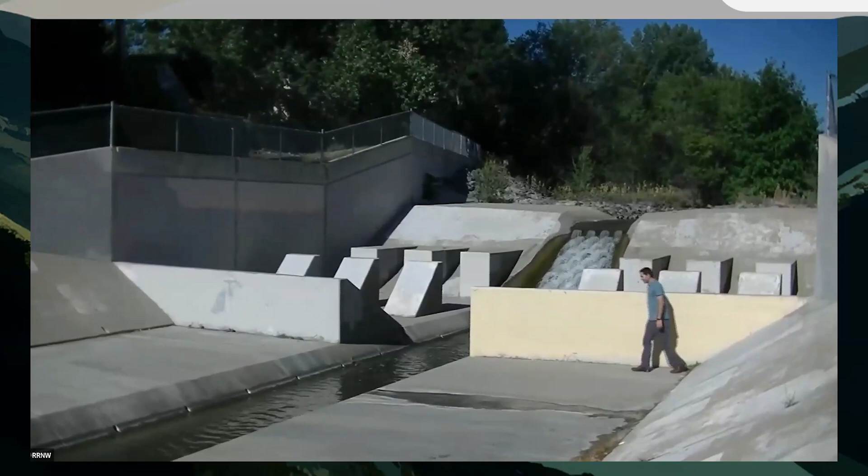All right, you guys do have a sense of humor. I love that. Yeah, I made that video, that sarcastic little video around 10 years ago, and it makes me kind of sad because over time it's a little less obvious that's me because I've gotten all salt and peppery and I got a beard now, and then I also can't jump that high anymore. So it makes me a little bit sad.

But yeah, that is the stereotype about how engineers like me view waterways, because in school we learn nothing about plants or fish or people, really not much about rocks, but it turns out they all can have a major role to play in successful restoration outcomes along streams and rivers.

So my agency is focused on flood risk, and that's hugely important, but floods don't happen very often. So how are we also designing for nature and community? These things can and should coexist, but it takes intention. If we get it right, we're not only making our communities safer from flood risk, but we're also making them more financially sound, healthier, and more livable.

So as we make decisions that impact these vital shared spaces, we have a unique opportunity, and I would say a profound responsibility. Decisions we make have an enormous impact on what's possible or not in these special places where land, water, and people come together.

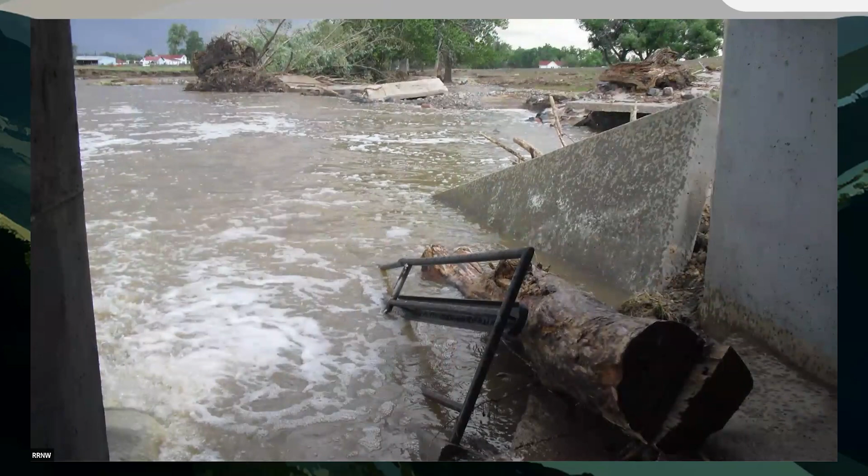But most of my job involves fixing or undoing previous land use and infrastructure decisions. And this isn't about judgment. My predecessors did the best they could with what they knew at the time and the societal approaches to infrastructure. But how do we learn from the past and make better decisions now? Now, some of this learning is technical, yeah, but it's also financial and philosophical.

So I'm going to show you what I mean with a lot of real project examples, some data, some graphs and maps, but also lots of pretty pictures and stories. So as Judy mentioned, I work at the Mile High Flood District. We're a special district that encompasses the greater Metro Denver area, and we facilitate the rhyme and reason to how waterways are managed as they cross 40 city and county boundaries.

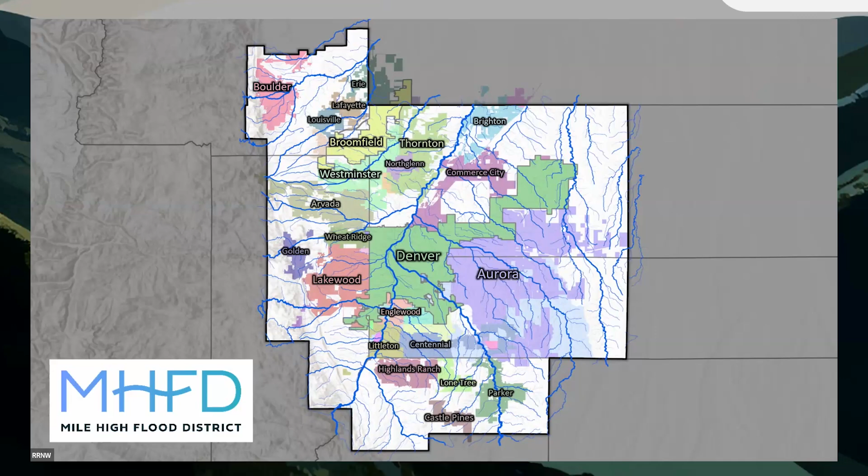We have one river we manage, the South Platte River, so there's 41 miles of that, but we have over 3,000 miles of what we consider regional waterways. So a lot of my examples are going to be on these smaller first, second, and third order streams, but the principles I'll be sharing can be very scalable.

For folks that haven't been to Denver, we're at the foot of the Rocky Mountains, not really in the mountains. We only get around 14 inches of total precipitation per year. The mountains limit westward expansion, but we have lots of room to sprawl to the east if we can find enough drinking water, which is not a certainty. We have some older parts of town too, so it's this interesting mixture of older at-risk neighborhoods that were built before we planned around flood risk, and total greenfield development and everything in between.

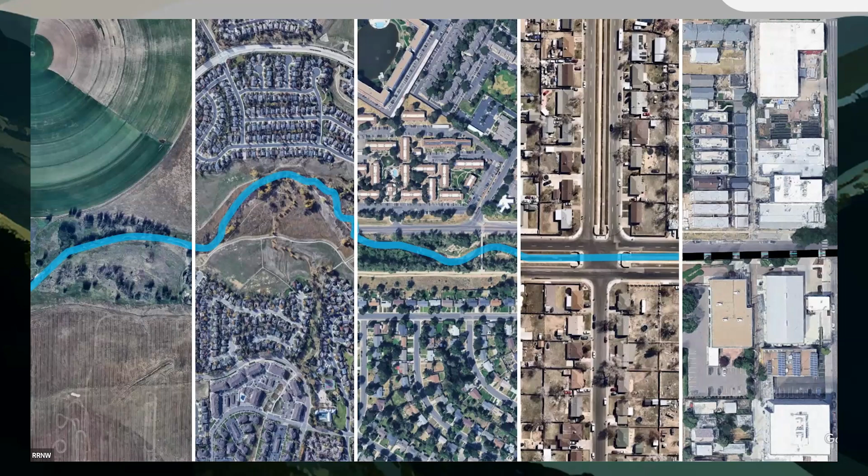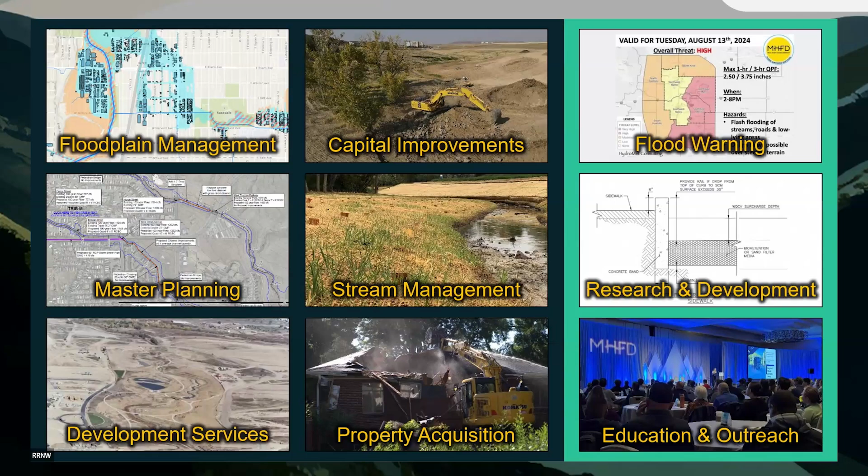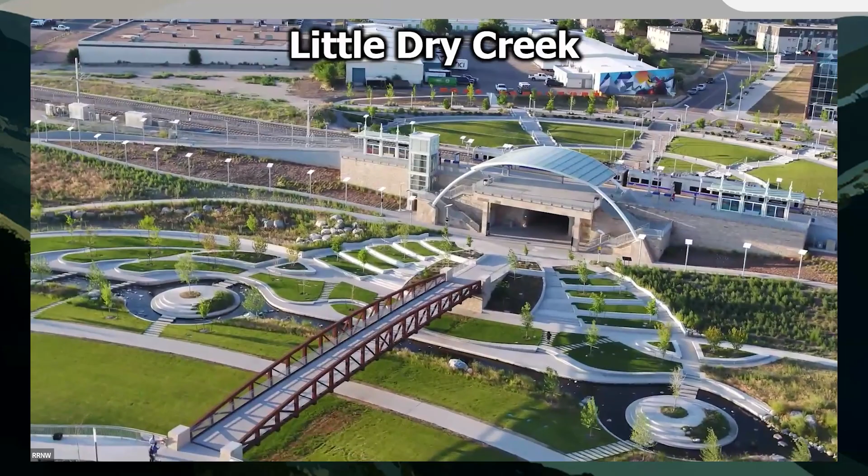So it's clear with the newer project what else is possible along an urban waterway beyond conveyance and stability. So here we're not looking at water as a variable to be controlled, but a force to collaborate with, to create a multitude of ecological and social benefits.

I like to call this blurring the lines. We're blurring the lines to let different functions share some of the same space. Now, I personally worked on this project, and one of my proudest career moments came recently when I was chatting with a young environmental scientist.

He told me that when he was going to college downtown at Metro, he would park at this train station and ride the D line to school every day. And every day he looked out the train at this project, and he told me it inspired him to become an environmental scientist. And I was like, oh man, I wanted to hug the guy, but I didn't want to make it weird. I don't get stories like that very often, but I share that because it's the kind of social impact our projects can have. It can inspire people like that.

Now, flood protection is largely driven by hydrology and hydraulics. These are foundational to our work, but I think of them as kind of the black and white aspects of what we do. Not necessarily easy, but they're quantifiable and mathematical in ways we're very used to. Now, upon this black and white foundation, we also consider these other elements of urban stream function. And I'm going to use the word urban a lot because that's where most of our work resides, but the principles could apply in more rural settings too.

But we use this to help us make more intentional societal choices about what successful waterway infrastructure looks like for a given context. So one of the ways I think about this, if the H&H is the black and white, then the other elements bring color. The browns, the greens, the other colors of the rainbow. It helps us take projects from good to great, makes them community treasures and not just utilities.

So when we talk about multifunction, these are where we start, and we give these equal consideration on our projects. They don't necessarily get equal investment, but we give them equal consideration to find what's the right balance on a project. And we balance them with capital and life cycle costs and the context we're working in. And we don't consider any of these as nice to have or icing on the cake. We feel responsible for finding the right combination, whether it's getting creative with our own funding or finding money from others who can help.

Waterway projects make a lot of decisions around topography and space allocation. And so if engineers like me are making decisions in a vacuum, then we can really limit what else can happen in the same location. Now, it also doesn't serve to focus just on any one or two of these and dogmatically focus on the one and ignore the rest. That usually isn't the right answer, and it just depends. But let's do a little thought experiment to see what this can look like if we get dogmatic about one of these and ignore the others.

And this is going to be with some AI renderings, and this is going to poke a little fun at some really extreme versions of projects. So just go along with me here, okay? All right, so this is an eroded reach of Cherry Creek in Denver, and let's say we want to improve it, and we only focus on flood goals, engineering goals, moving water from point A to point B. You can imagine what this would look like. It'd be the LA River, right?

And let's say we're worried about velocity, so let's include some baffles in there. We don't want people thinking there's a trail down there. I mean, my goodness. All right, I'm glad you guys are laughing. These are meant to be funny.

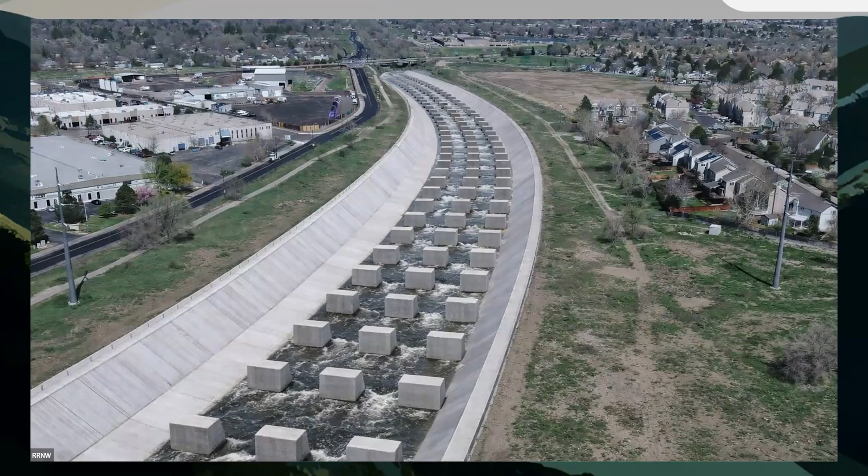All right, let's have some fun if we've thought of this as just a nature preserve. This is not for people. This is a nature preserve. We're going to put in a trail closed sign. You can't tell, but we've planted some poison ivy and some thorn bushes. We're going to reintroduce some fish, maybe some apex predators while we're at it. We're going to throw in a grizzly bear, maybe a pack of wolves. Why not? It's like Yellowstone in the city. It's fine. There's a time and a place.

Okay. All right. Let's switch this around and just focus on people. This is only a place for people.

We're going to make it a paradise for people, and so we're going to manicure this. It's going to have lots of clean lines. All the turf is mowed into perfect strips. Every tree has a seat wall around it. We've got an amphitheater, public art. And let's amp this up another level. Let's go ahead and color the water with some dye, just to complete the Disneyfication.

Well, let's give geomorphology a turn. If we only focused on geomorphology and we thought, what did this creek look like in nature before humans existed anywhere in this watershed? Well, it was a braided stream. Let's go back to that. Any of these projects could be the right answer somewhere, okay? And all I'm trying to imply is that we need to find the right balance between these. That's very contextual, and every project site is going to be a little different.

So this is going to show the actual restoration we built. That's only a year or two post-construction, so I rendered what it will mature into. This is the balance we achieved given this context next to a road, next to homes, and with the hydrology we're dealing with, the sediment load.

And then my presentation cover photo is a real photo from this project site that shows you that balance of ecological and societal functions all in this one very real non-AI photo. I did not AI that bird in there. I really got that, promise.

But this project existed before we figured out how to articulate and simply explain our design approach to others, so this is where the 5 elements have been helpful. A different project would need to strike a different balance. But hydrology is foundational to these outcomes, so let's dig into a quick hydrology anecdote.

So when you see a stream or river in nature, you're seeing an outcome or result. I stole that phrase from Luke Swan a few years ago. And that result is largely driven by climate, geology, and hydrology. And the stream functions pyramid from Will Harman helps us understand how these base layers drive outcomes of the layers above. Our 5 elements were a derivative of this pyramid.

Now we can't control climate or geology. We don't really control hydrology, but we do influence it with how we mitigate urbanization with detention basins and green infrastructure. So let's look at an example of the role urban hydrology plays in stream stability and nature-based design.

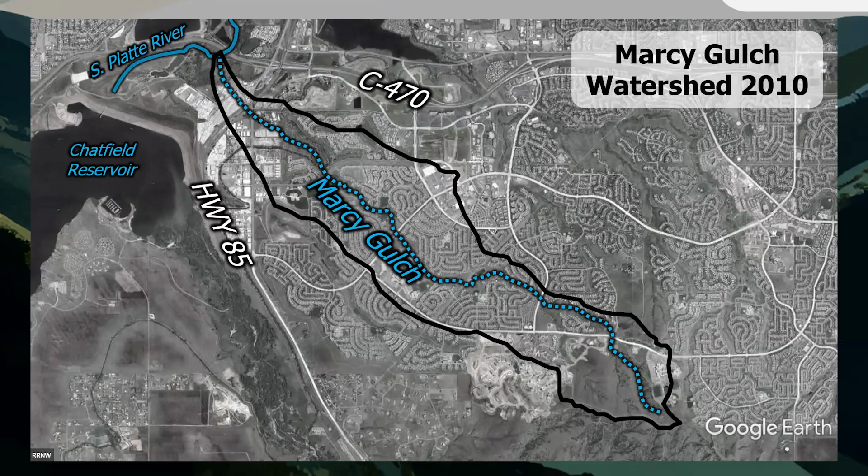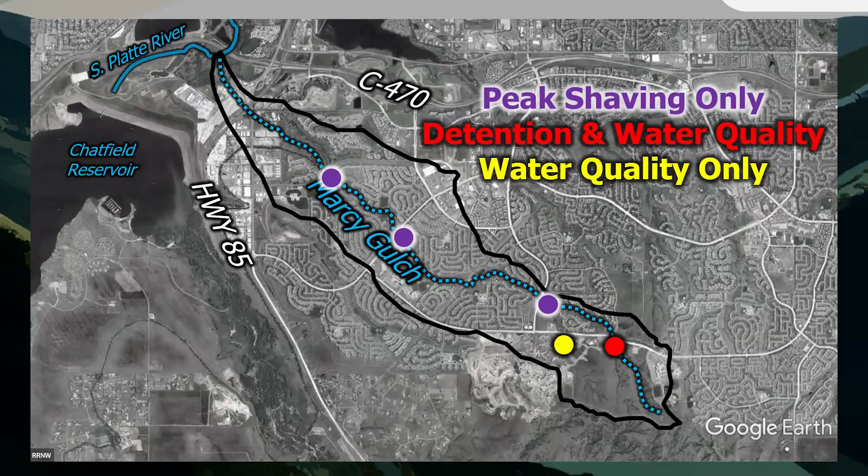A few notes about how this watershed developed from a stormwater management standpoint. You see detention was implemented at the dots on the map. The purple dots only mitigated for 10 and 100-year peak flows. They left a lot of room for the stream. The thinking at the time was no stream stabilization should be necessary because of the online detention. So it was left untouched. That was our approach, preserve a wide corridor and then mitigate for some of the peak flows. So let's see how this played out.

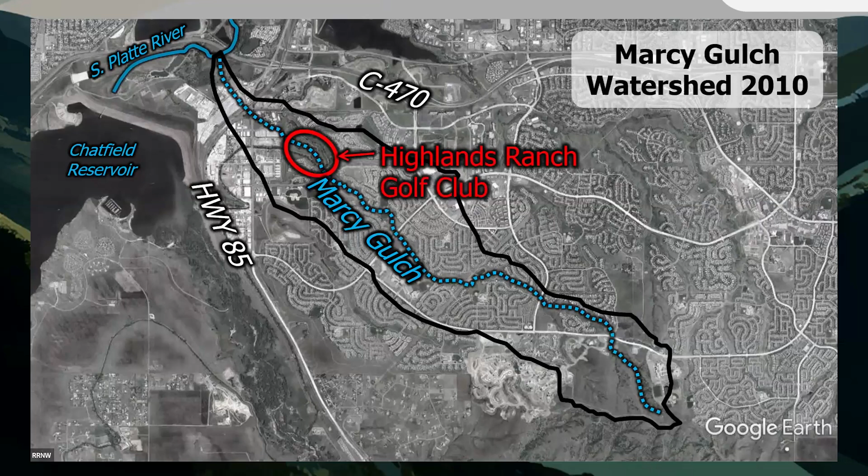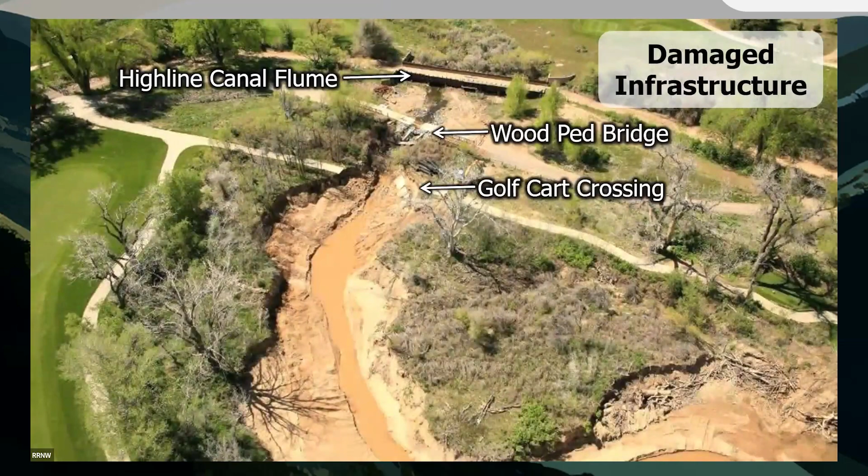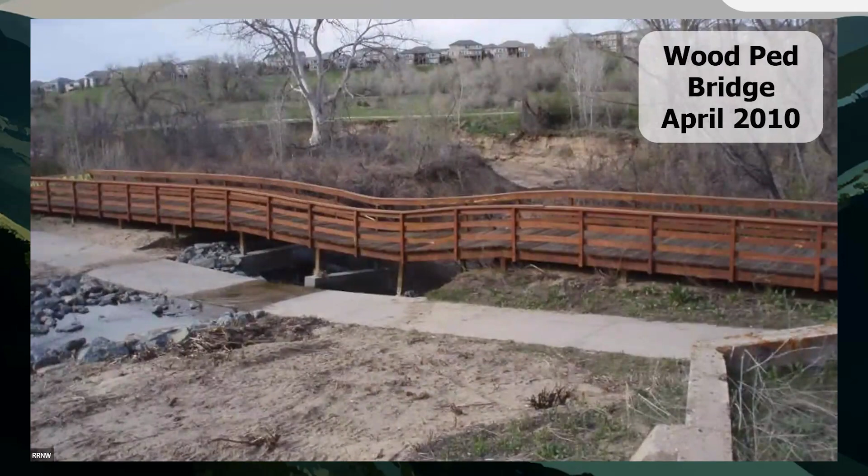The erosion paused momentarily at the golf cart crossing, and then another storm hit and wiped it out. The footings on this ped bridge were already hanging from the bridge, and then the next storm hit, took it out. This flume carries a water supply canal over the creek. There's concrete footings at the bottom, and now how much they're exposed.

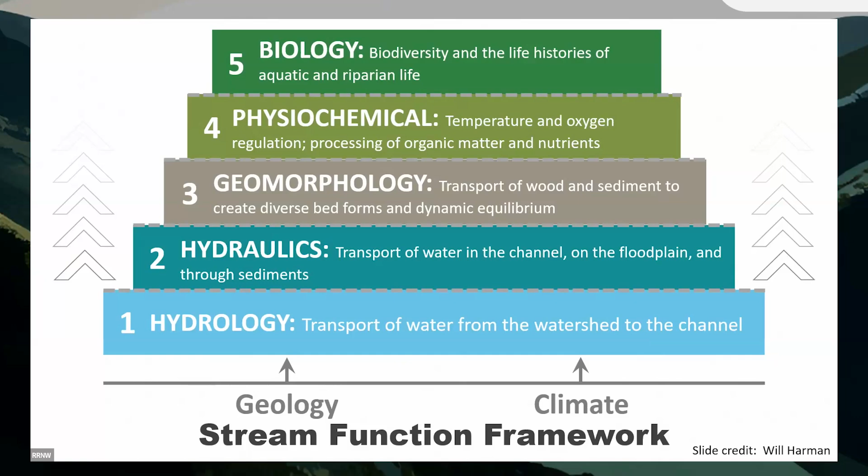These were the consequences in the receiving stream stemming from the land use and stormwater management practices at the time, so the hydrology. The stream fell apart because in its native state, it wasn't equipped to handle urbanized runoff. Now the base of the pyramid changed, so it impacted everything else. The detention basins reduced flood risk, but they did not recreate the natural hydrograph. They didn't make it natural. I would argue they can't really make it natural.

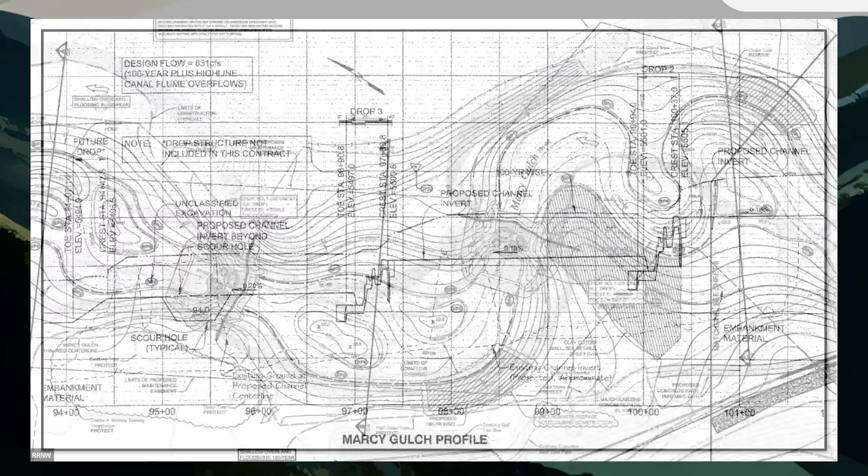So a restoration project was designed. All that sediment had to be replenished. The slope was flattened from 1.8% down to 0.2%. It's really sandy soils, and we used several expensive drop structures like this to control the hydraulics and protect the sandy bed material so that in between drop structures we could rely on vegetation for stability. And so this is what it took to get this reach of stream back into balance. This shows a few before and after images of what the restoration achieved.

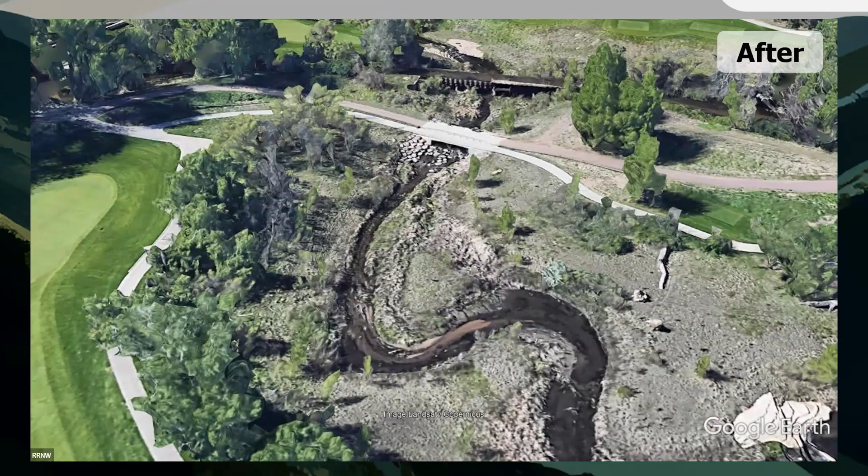And so this example demonstrates why native streams are usually incapable of handling urbanized runoff without severe erosion. But it doesn't mean nature-based solutions are dead on arrival in an urban setting. It just means that we can design them to look and mimic nature, but they need to withstand quite unnatural flow regimes. So we see this as going forward with a healthier, more balanced relationship with nature, given the flow regime we have to work with.

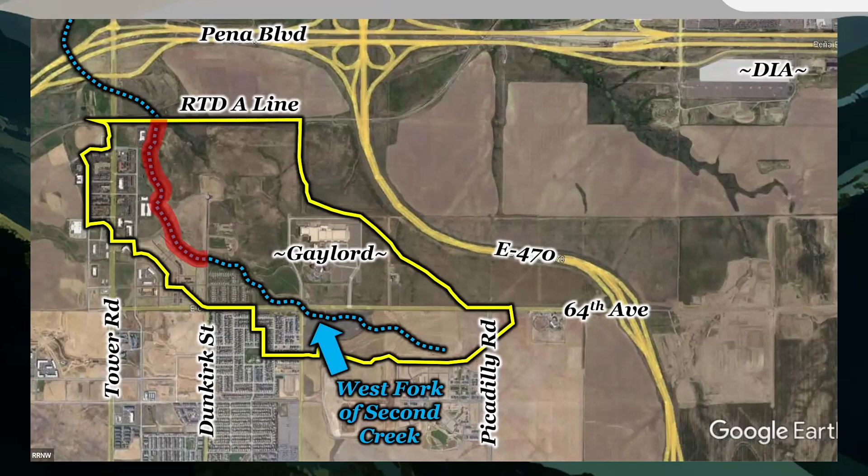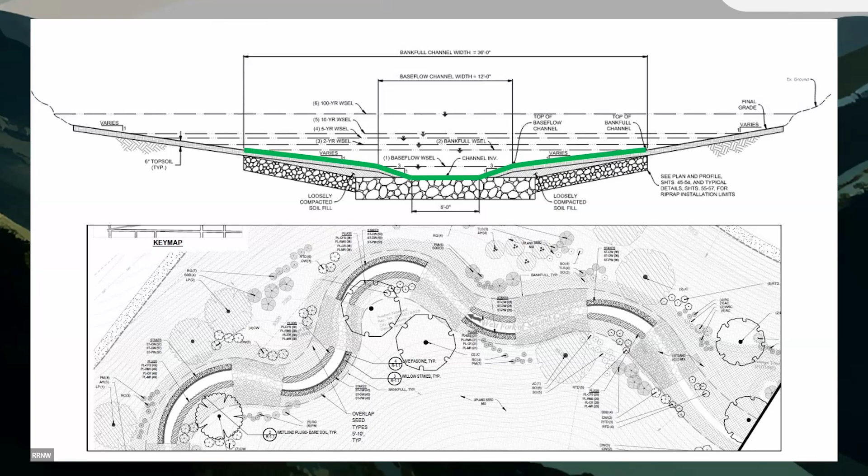They're still prone to erosion, but with both our cross-section and our plant palette, we considered what is going to be the flow regime when we build the project, and what is this going to mature into as the area develops. We were building this before there were many sprinklers or leaky water mains upstream, but we knew they were coming. It was actually studied around Denver that about 70% of our base flow is drinking water, which is interesting in our streams and creeks.

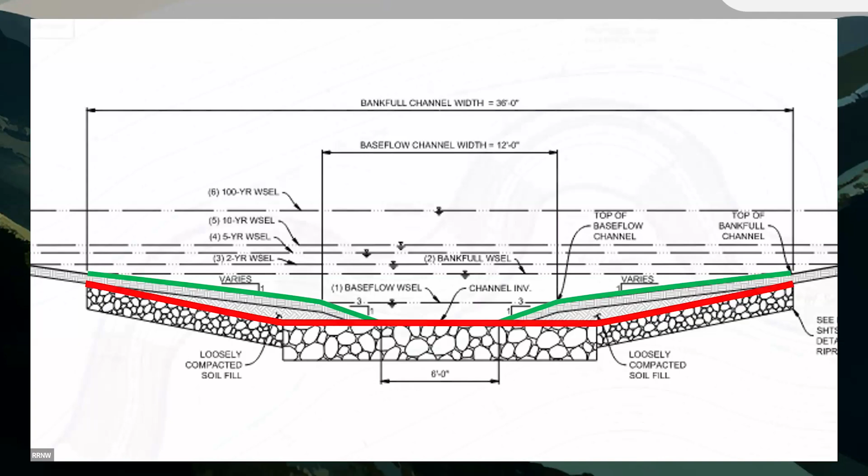So an important point about the riprap: in nature, streams move, of course, and that's a healthy thing. We were mimicking natural form and processes with constructed riffle pool sequences. The unnatural hydrology meant that some rock was needed for stability, but we actually don't want our active channel to move around the valley like it would in nature, because rock like this doesn't exist anywhere in the upstream watershed.

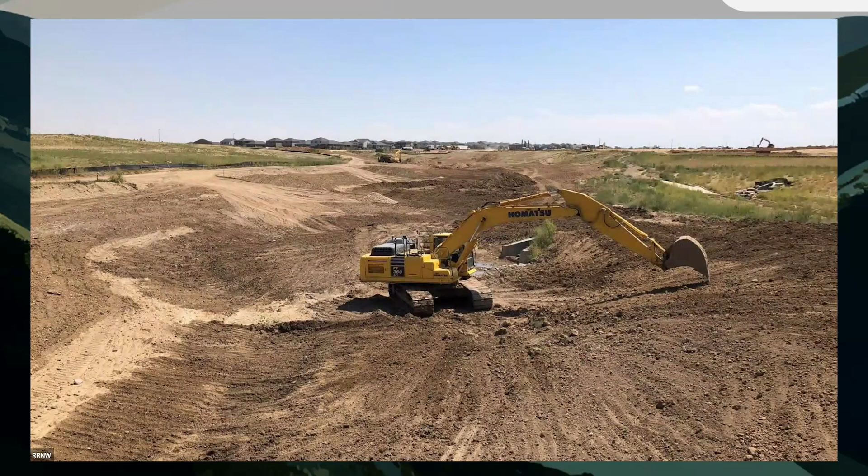You know, natural streams have rock bed material that can migrate in from upstream as things move around. We don't have that luxury here. This shows the native bed material. So any rock we put there, we need to stay put even in a major flood. Here are a few photos of the project before, during rock placement, and then after. So I call this design a bit of a cyborg. It's part natural, part unnatural. This is one of the ways we've learned to collaborate with nature rather than trying to strictly control it.

Now this design relies heavily on vegetation. Colorado's semi-arid, so we didn't have irrigation here. It took us 5 years to establish healthy native vegetation.

Does it take you guys about a month with all the rain you have here? When I was driving here, I saw moss on a Jersey barrier. It blew my mind. I can't even tell you. I was like, they have vegetation on the Jersey barrier.

Very jealous. All right. But we have an internal environmental group that takes over these sites for us and does a great job, because resilience can't just be built, it has to be grown ecologically. For us in the past, 10, 20 years ago, environmental folks were primarily involved to help us just with permitting. But when we rely on vegetation for stability, the ecologists have become mission critical beyond permitting. We formed our first environmental team around 5 years ago.

So they do help us with permitting and compliance, but they also help us with vegetation establishment and daily stream management in ways that engineers like me are just never going to be interested in. So pretty much once the yellow iron leaves the site, once heavy civil construction is done, I'm pretty much emotionally over it. So I'm really glad the environmental folks are just like jumping for joy to get in during this part. It's great.

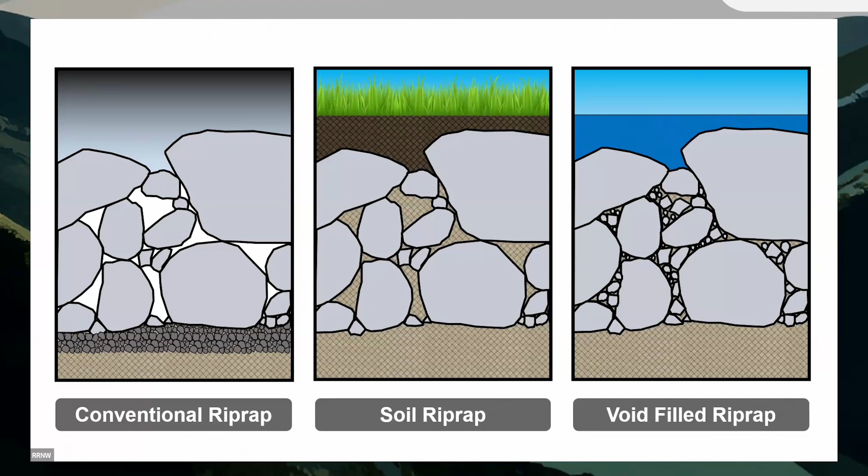Where we need riprap in stream beds to prevent vertical migration, we fill the voids with a mixture of smaller rock to create a dense rock matrix that mimics mountain stream beds. Here's a quick video showing us mixing the void filled riprap. It takes a lot of space to stockpile materials and mix it, stick it in a truck, transport it to the location. Here we're building a constructed riffle, and they have to work the mix a bit once it's in place.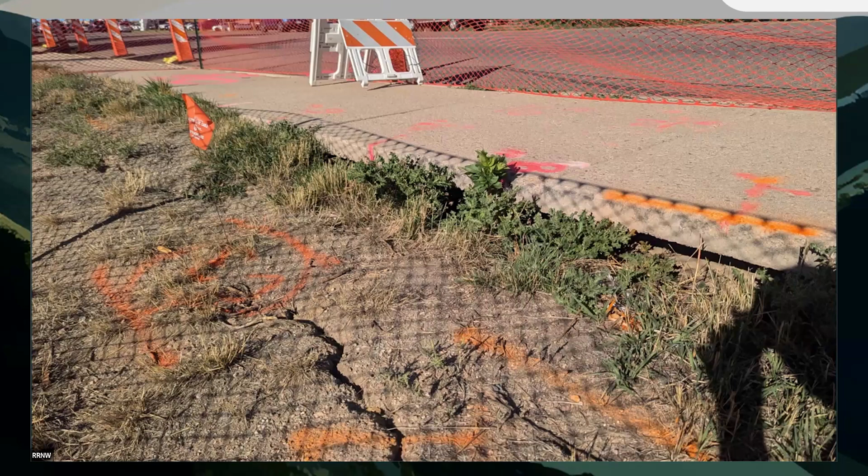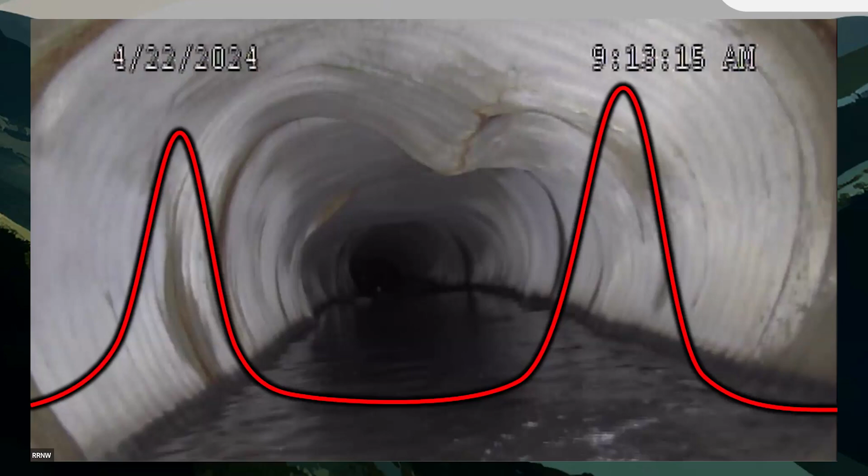But so these projects are expensive to begin with. They get expensive again because the structural solutions get weaker over time. So as an example, there must have been a great corrugated metal pipe salesman around Denver in the 1980s because so many of them are failing. And we had one community had so many sinkholes like this from failing CMPs, they started to name them like hurricanes. This culvert's in a 30-foot embankment under Broadway Boulevard, so it's a big red hump.

With the more naturalized solutions, not only are they less expensive up front, except perhaps in land, they tend to age better because vegetated solutions get stronger over time. Maintenance is more about gardening than it is about replacing concrete and steel. Looks more like the green curve. On the Little Dry Creek project I showed you earlier, the recent project costs us only about $2 per foot per year for routine maintenance. It's the little green blips.

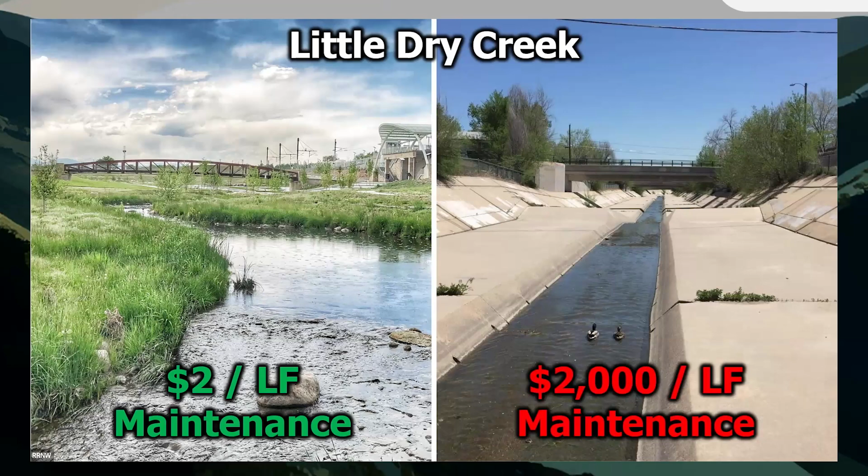The older project costs us nothing per year right now, but when that concrete needs to be replaced, it's going to be about $2,000 per foot. It protects people from floods. It's been an asset, but it's also a financial liability that's going to come due someday. It's sort of like a misfit part in an engine. It may work for a while, but the system is constantly trying to break that.

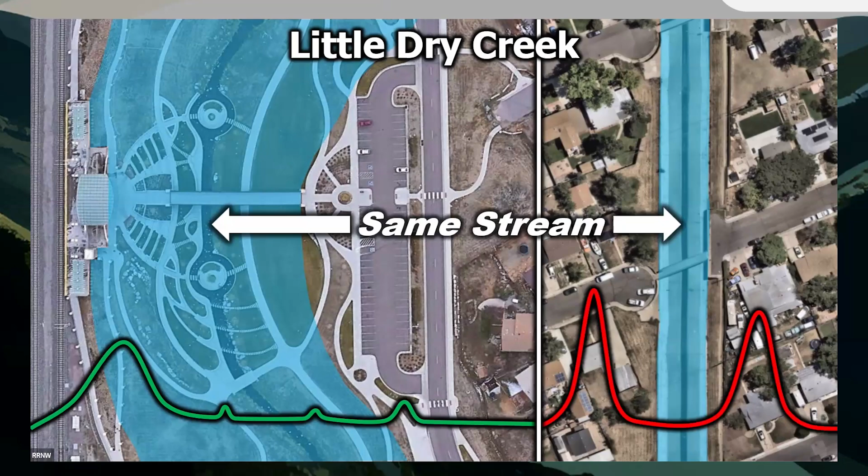So this is why we require larger corridors for new greenfield development, because we shouldn't have to rely on all that hardened structure. Now, nature-based goals are highly impacted by how much land we have to work with, and developers may build the first red hump, but they're usually long gone by the time the second one shows up. That's the taxpayer's problem. And it's a special kind of torture for me to repair concrete channel lining. It's expensive, it's unsatisfying, and then if you ever want to tear it out, like on this project, it becomes a capital project with a capital C, and the second hump becomes even bigger than the first hump.

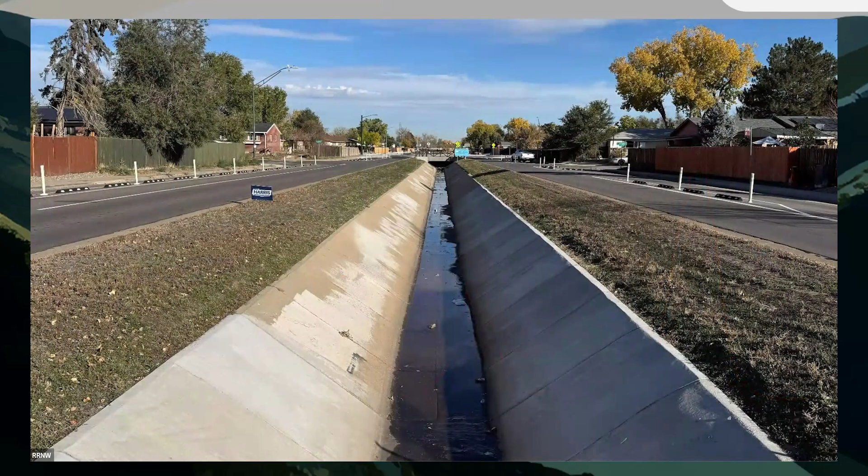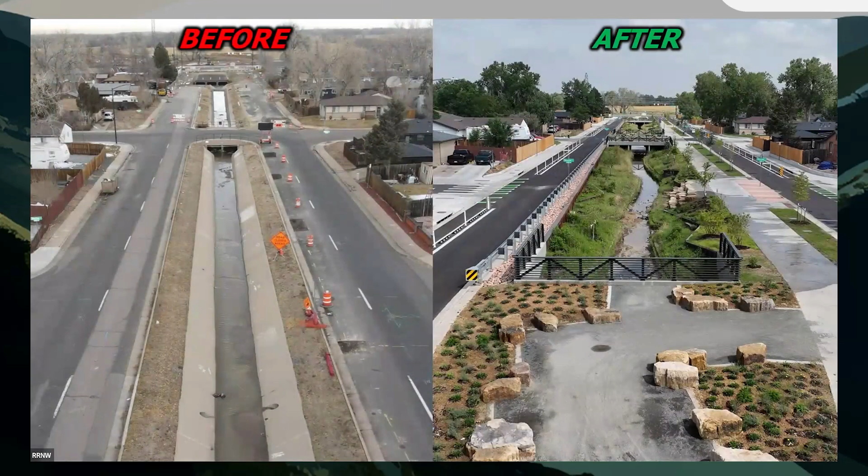Okay, we just wrapped up reconstruction of this entire corridor from fence line to fence line, and over time this is going to become a beautiful tree-lined median. That's a real picture on the right. The entire 100-year flood now fits in the channel. There's lots of buried riprap along here to give it stability, but like I said, resilience isn't just built, it's grown.

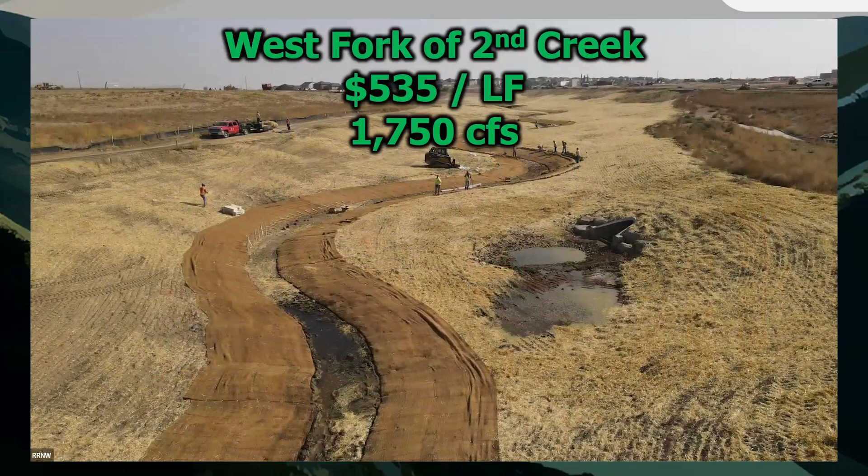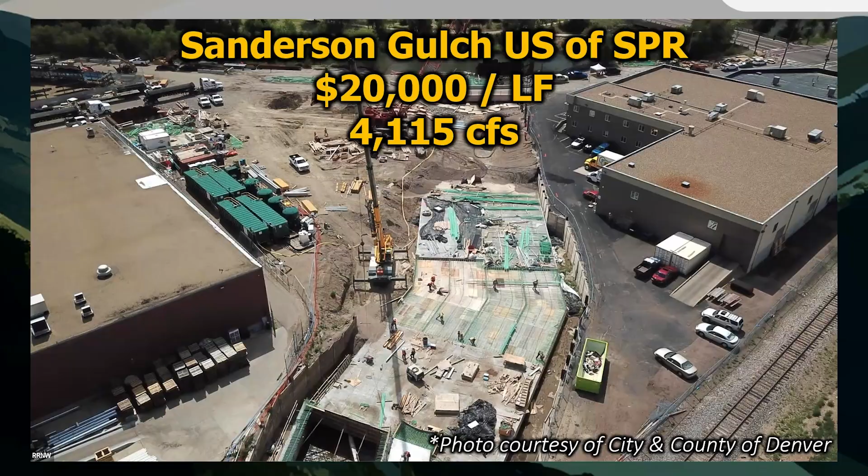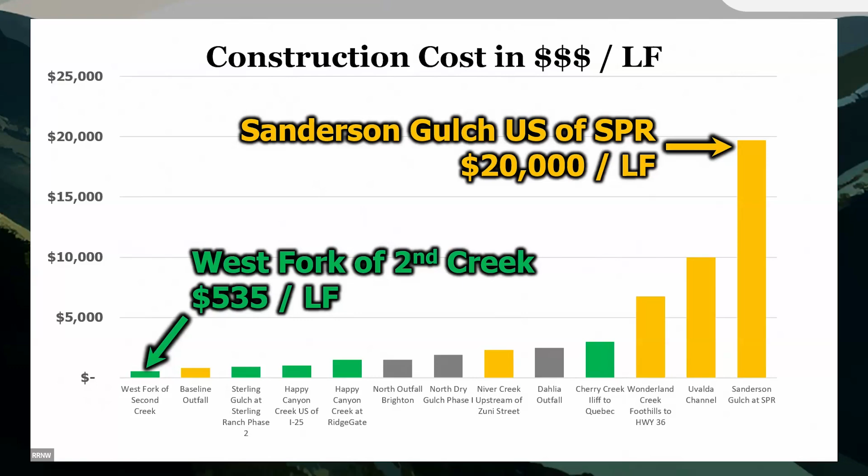And I'm not saying that more expensive projects like the one in the background are unworthy. That project is in an older part of town in an underserved community. The project on the left was basically in an empty field. Every project is contextual, sometimes painfully contextual, but even in a challenging context, the value we're able to create can make it worth it. But it's really clear the amount of land we have to work with has a huge impact on what's possible or not.

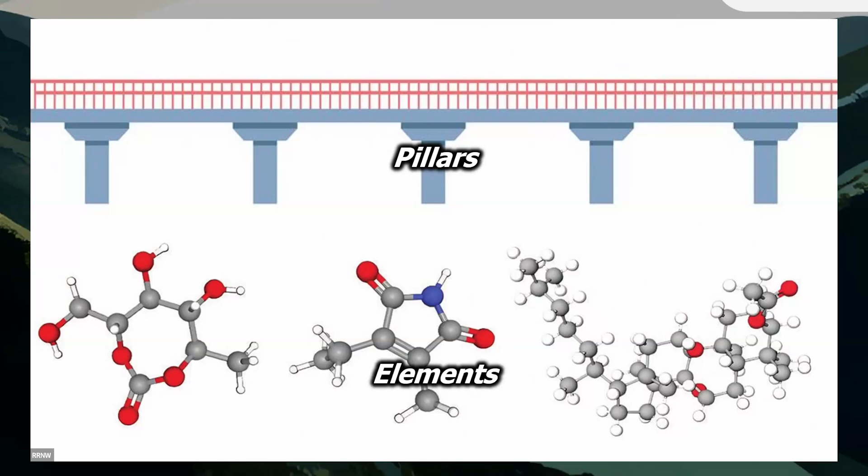So when we came up with the 5 elements, they were originally called pillars, but we decided pillars may be the wrong imagery because pillars need to be equal in size to hold up a bridge. So we decided to call them elements because really the point is that each project is going to have a unique contextual mix of each. That's not going to be the same from project to project. It's a balance.

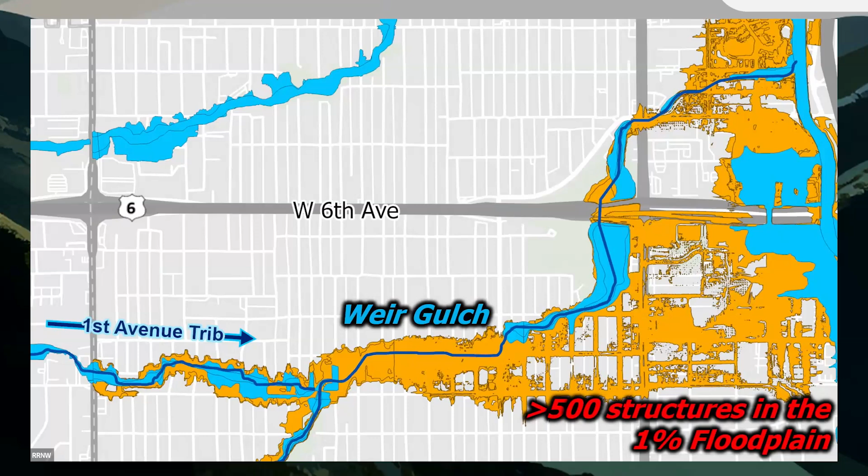So on this next project, we're just getting started on a 3-mile flood mitigation project. There are over 500 structures in the floodplain. The project may cost $200 million. It's in an underserved community with low tree canopy, so it's several degrees hotter than its neighbors, has a lower life expectancy, history of redlining. That makes the housing really affordable, but we may need to purchase and demolish dozens of homes to address the flood risk. So there are going to be very human consequences to the decisions we make.

So we can't just think of this project in mathematical engineering terms. We have to consider humanity. So the right project here is going to be really hard to figure out, and it probably should be. But constraints breed creativity. So as we pondered more detailed design, could we redraw any of the lot lines to rebuild homes? Could we rezone some lots as multifamily to reclaim an equal amount of housing? Should we prioritize protecting homes owned by the people living in them, creating generational wealth, versus protecting homes that are rentals? These are some of the things we're thinking about. And we're doing extensive community engagement because we want residents to feel like we're doing this project with them.

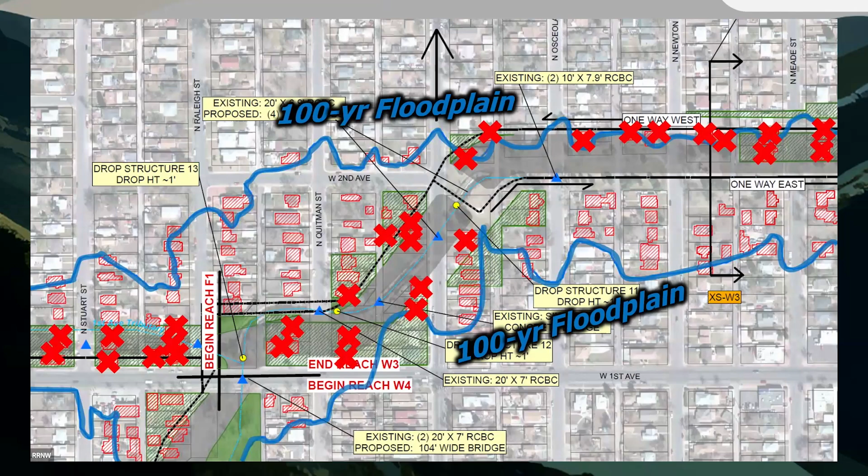Because be careful when you do something for people, eventually you might feel like you did it to them. So when we don't consider humanity, our project outcomes can really underwhelm. So let me share a project example of my own from about 10 years ago to illustrate.

So on this Hoffman Drainageway project, we took the floodplain from the red to the blue. Off to the right, it interacts with the receiving stream. But this project was built in conjunction with the North Metro rail line in yellow. And where I failed was in not recognizing the need for mobility improvements our project could have helped with.

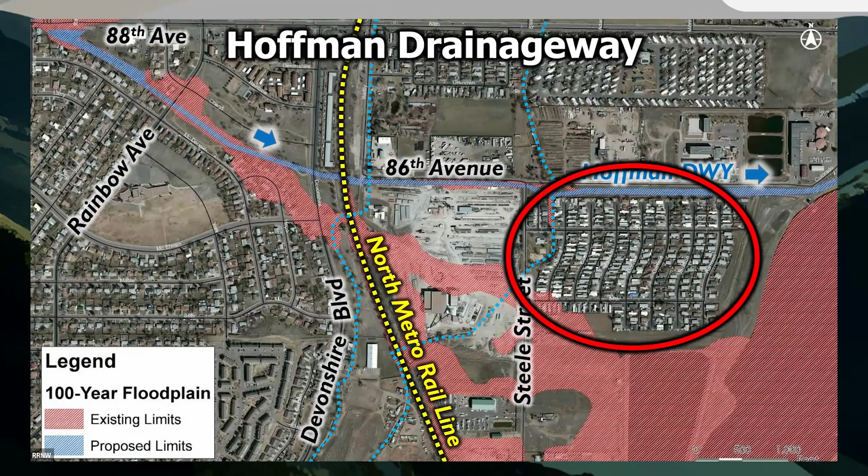So folks in this neighborhood, affordable housing neighborhood, walk up to 88th Avenue for basic shopping and to get to school. There are no sidewalks, so here's what it looks like for a dad and his daughter.

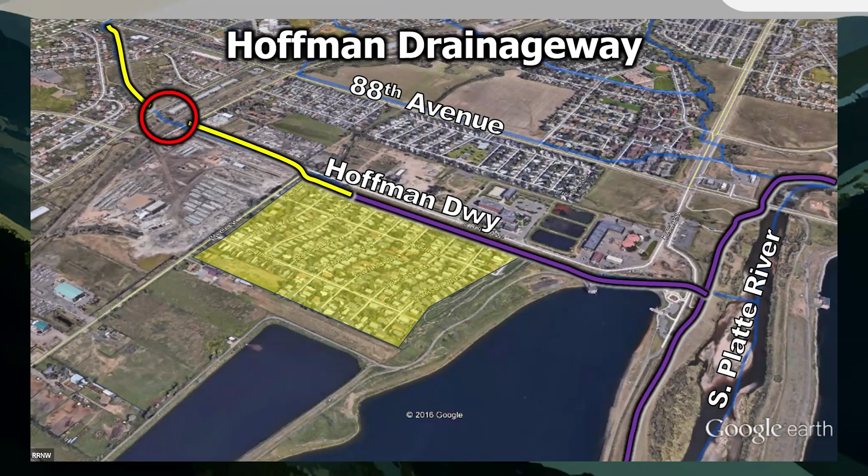We built some new sidewalks in yellow, but of course they stop abruptly at the rail crossing. And so I really regret not recognizing this and not being a champion for more holistic solutions because these folks deserve better. I would say everybody does. And now that that culvert's there, we may never get an underpass at that location. So we missed an opportunity to improve people's lives.

I feel like we had blinders on because we were just building a flood mitigation project. And I think of that word just as like a 4-letter word. I mean, it is a 4-letter word, but you get what I'm saying. It's so tempting to just get projects done. Being more aspirational, pondering more possibilities, it doesn't necessarily make projects more expensive, but it does mean we have to work with and talk to more people.

Projects that accomplish more are harder, not easier. But value is the goal. We need to be good stewards of taxpayer dollars, but investing in cheaper projects that create less value to the community isn't doing our jobs well.

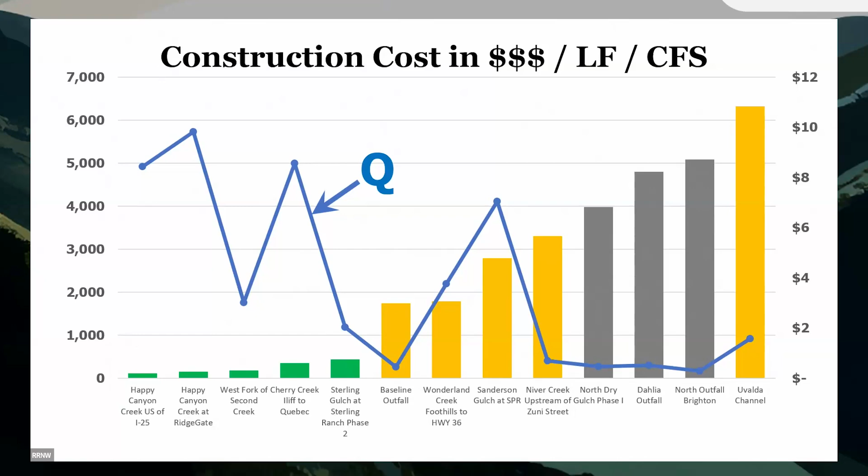Getting back to this graphic, this depicts dollars per foot per CFS. As we make land use and infrastructure decisions, we prefer to avoid costs like the ones on the right, which is easier in new greenfield developments and harder in the messy urban retrofits. But what's not on here is dollar per unit of value, because value gets beyond CFS or hydraulics. Now, I find cost is easy to quantify, so are design flows, but value can be hard to quantify.

So we basically come up with a project-specific constellation of success metrics to measure different versions of the same project against itself. And this is all intended to help us understand value in addition beyond flood protection and clean water, because it isn't our goal to build the cheapest projects possible.

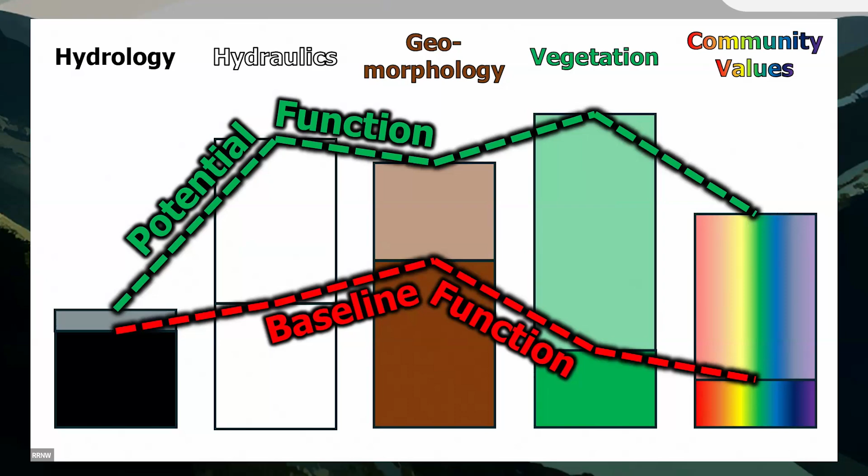In the audience is Dr. Brian Murphy. Brian, where are you at? Is he here? All right, I don't know where he is, but Dr. Brian Murphy, his doctoral dissertation was about this topic. So if you want to dig into that with somebody here, he's your guy.

All right, getting back to this Uvalde project I showed you earlier. We were impacting a polygon of public land. There were many different choices about how we could reallocate that public space. Clearly, the existing road section was very focused on cars. There was not much room for hydraulics, pedestrians, or cyclists. There was no habitat, no shade.

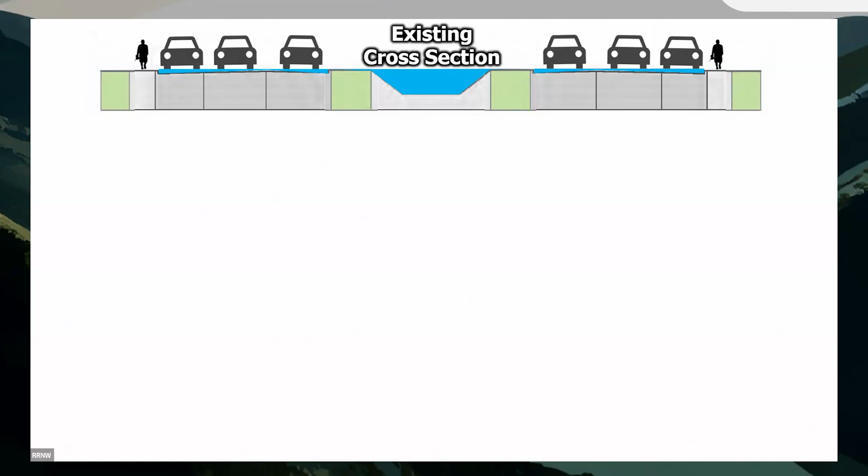So here you see it diagrammed in cross-section. So how can we make better use of the land we have to work with from left to right? Now, using the street to carry riverine flow was a non-starter because of that stranded car we saw earlier, so that gave us a bit of a starting point, so we're not going to do that. Here were the 2 cross-section alternatives we narrowed it down to from 16 that we considered.

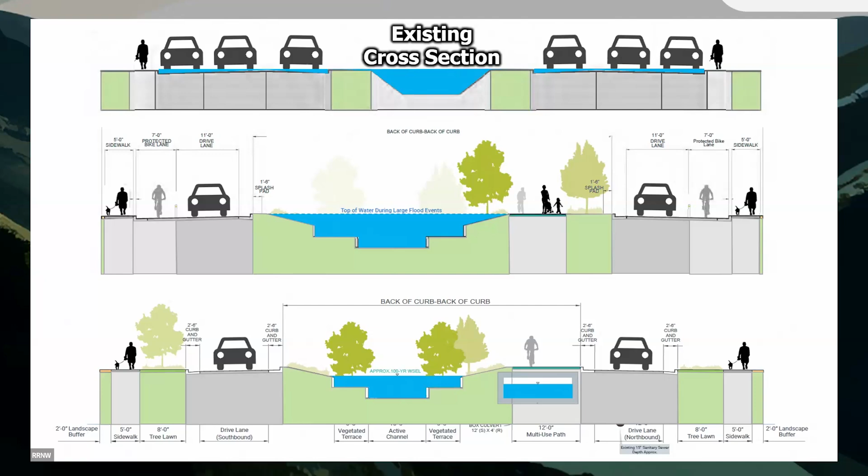And I would say that a public space being great will be judged in the eyes of the people who live near it. We want this outdoor space to feel like home to them, because I don't live there. And so that means they need to feel like they're part of the process. So notice how conveyance was just one of several diverse variables that we considered in our decision-making.

Now, the design project manager on this is a guy I highly admire, and he said this project achieved the best balance of any project he'd ever worked on. He said balancing of value. He was really proud of that. And so it's important to understand value, what we get for our money, and not understanding the difference between cost and value can have consequences, like, say, with tattoos.

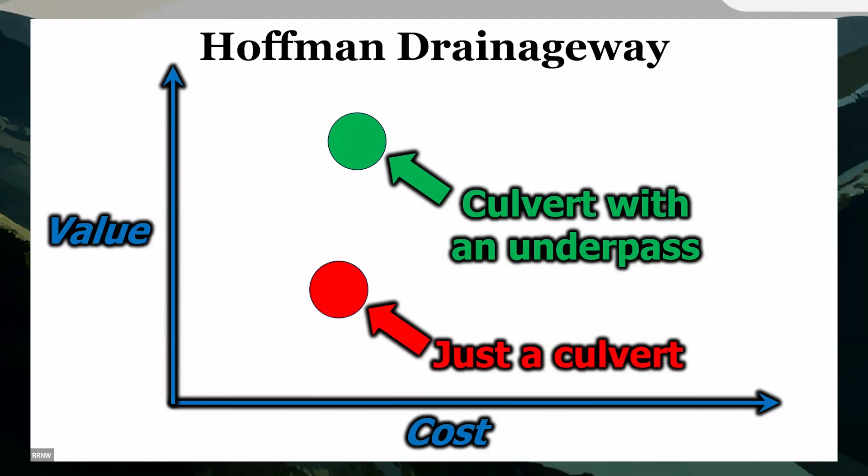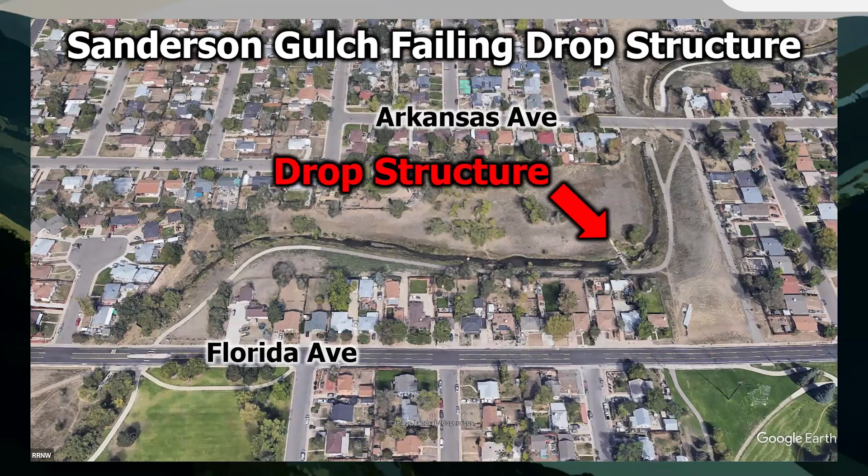Okay, some other examples. This drop structure needed replacement, and someone had the curiosity to figure out that both the upstream and downstream culverts were due for replacement soon. And so if we just rebuilt this drop structure as is, it would inhibit improving the downstream Arkansas underpass, which is the shortest one I've ever seen. It's 6 feet 6 inches high. I have walked through this, and you're just praying nobody comes zipping through the other direction at the same time. And also, moving the drop structure also makes a new underpass here at Florida possible.

So this went from a $2 million drop structure replacement to a full corridor lowering, including 2 road crossings. Became a $16 million project. But great projects find funding. They've received $6.5 million in grants and funding from multiple departments. Sometimes more is more. Projects that enhance the community beyond flood protection tend to attract more funding.

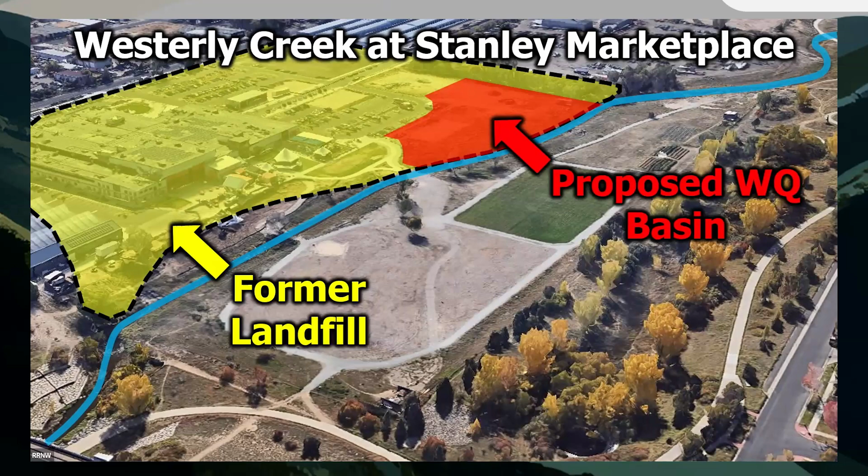This next project started as just a regional water quality basin. This location would have required walls, and it's in an old landfill. So between the walls and the landfill, the cost for the value math wasn't mathing very well, so someone had the curiosity to ask, could we move the creek and put the water quality basin where the creek is now? With this being the only stretch of Westerly Creek in the area that's never been restored, that made a heck of a lot more sense. It avoided walls and the landfill.

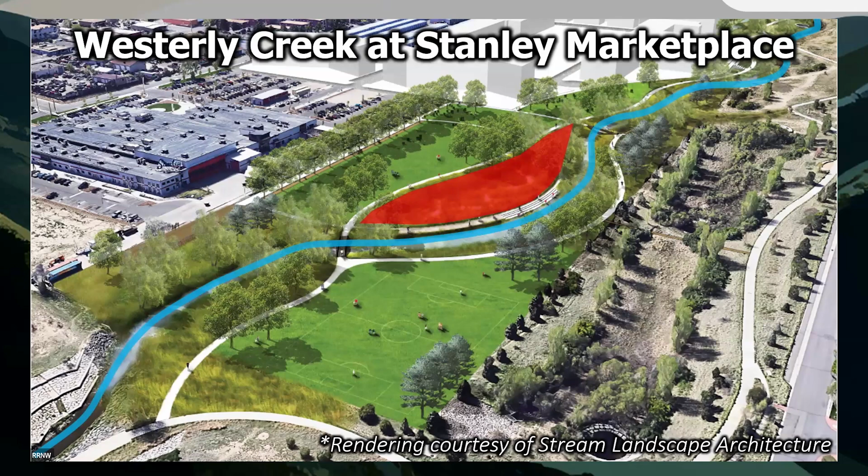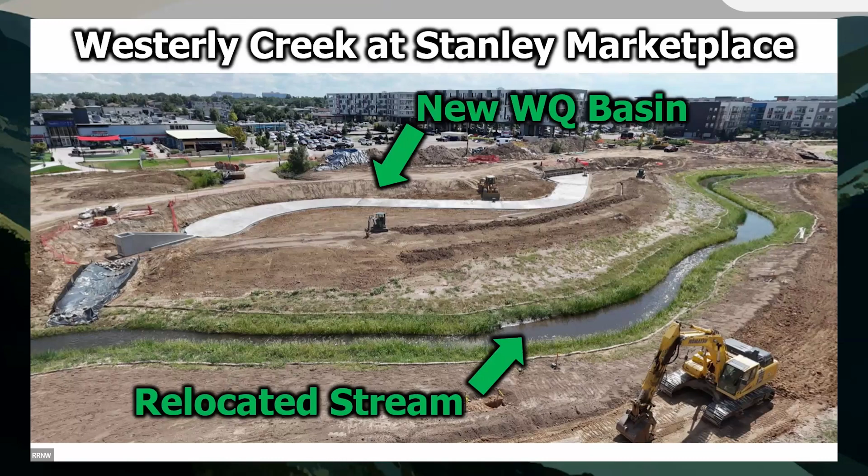This one started as perhaps a $2 million project, became a $15 million project that is creating vastly more value per dollar invested. It's received over $3 million in grants, and we're still hoping for more. Like I said, great projects find money. This is under construction, so you can see where the new water quality basin is going, and then the relocated stream. Those are grasscrete pavers in the bottom of the water quality basin, so those will fill in with vegetation.

Looking back at our collapsed culvert on Lee Gulch at Broadway, since we've had to dig through a 30-foot embankment to replace the stream culvert, it was cheaper than tunneling.

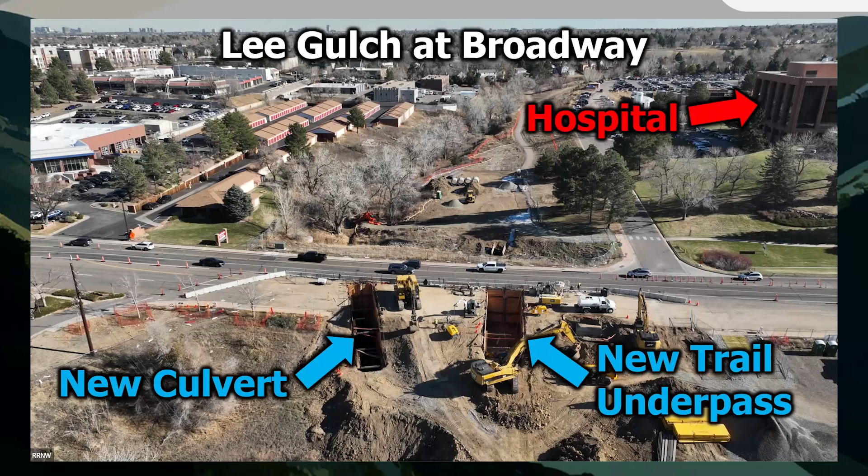We took the opportunity to add a trail underpass for the first time. It's under construction right now, and that building on the right is a hospital, so the traffic control's been pretty fun. But it's another example of building the most valuable project we could for the money. It's better to dig through Broadway once for the culvert and the trail underpass. Now, I'm not suggesting we go and make every project more expensive, okay? But every project should find the sweet spot of cost and value.

But additional function is possible even for an end-of-pipe retrofit like this. This pipe drains an older neighborhood with almost no stormwater treatment, and there's this trickle of flow, an ooze of flow we call urban drool that comes out of it all the time.

I heard somebody else say drool yesterday. I think that was Luke.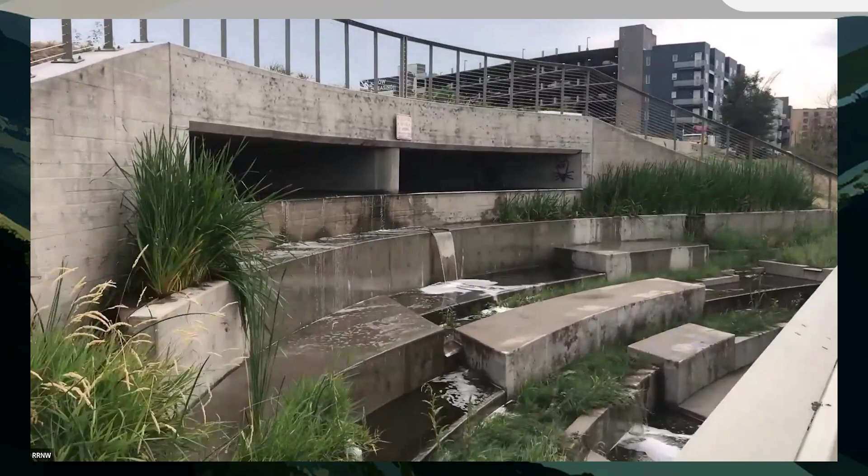But some creative folks figured out a way to put the drool to use and improve water quality by running it through a series of planters that also serve as public art for people on the trail to stop and appreciate. And so by running it through the vegetation, it has a cleansing effect before it reaches the river. And yes, it can handle floods just fine. This added some cost to the project, perhaps 10 to 20%, but it's hard to argue that wasn't at least twice as valuable as a traditional outfall.

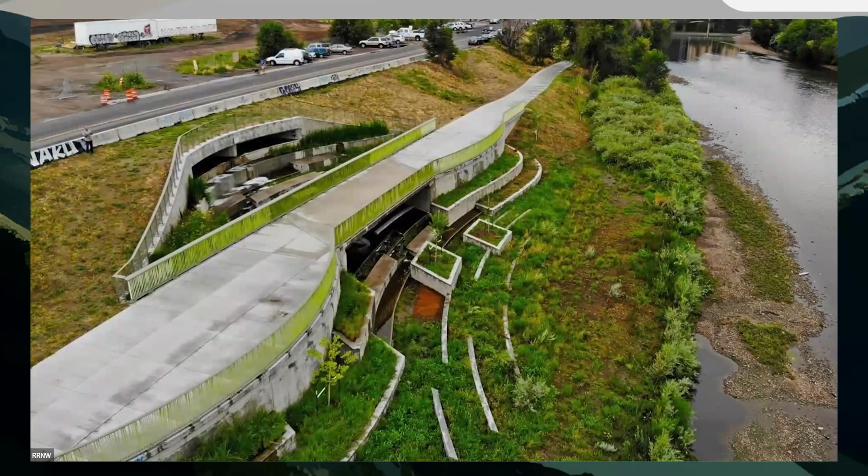This next example, one of the most novel designs I've ever seen. There was no room for a floodplain on the sides of the channel, so they put it underneath. The project team called it a stream mullet. So it's a party on top and business on the bottom. I really wish I would have thought of that, but I love sharing. There were over 100 structures in the floodplain, and the project was able to reduce the floodplain to this. They had to thread the needle under a railroad, under a busy collector street, in between several industrial buildings.

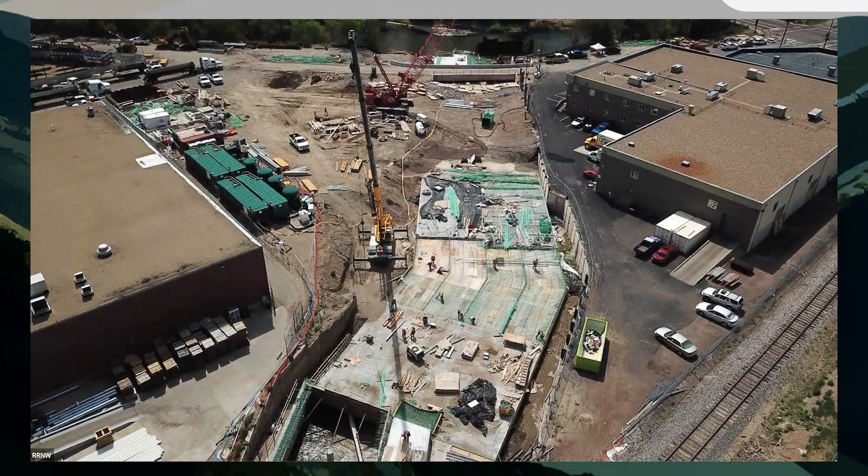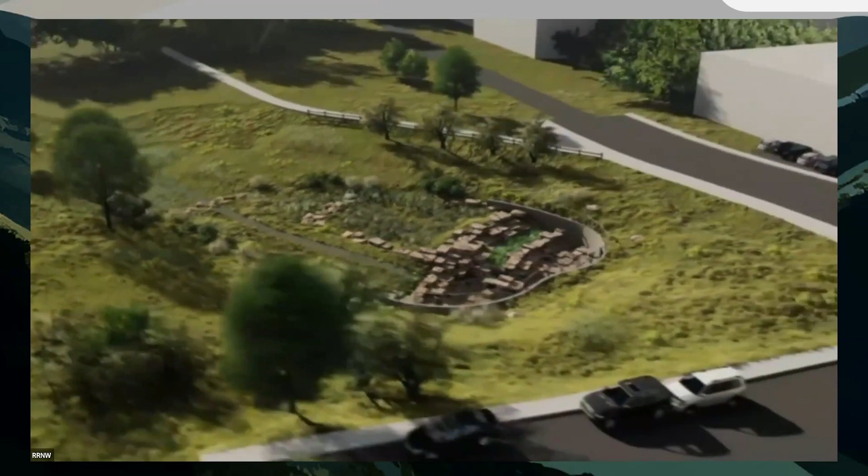But the most special part of the project is how they managed to create a multifunction naturalized channel on the surface, to convey the daily flows and the smaller storm events. That was the party on top. And then the gray conveyance is buried underneath and out of sight. It's the business on bottom.

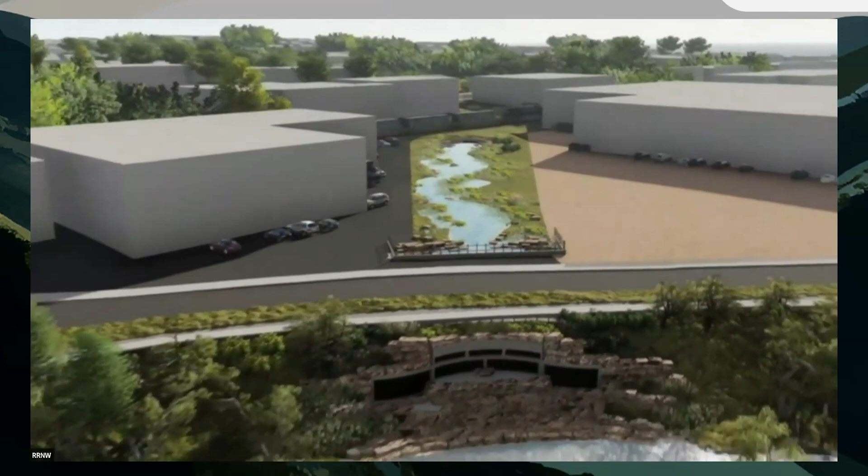So this is an animation showing you how it works. The daily flows go through the culvert at the top and feed the channel. In a bigger event, they spill into the culverts that are underneath all of that. I think it's about a 2-year flood that the top channel will convey, and then when it gets to the river, it all comes out in the same spot. Here's the completed outfall conveying some really gross flow on a rainy day. I'm not sure why it's so brown. But then here's what it looks like on a sunny day.

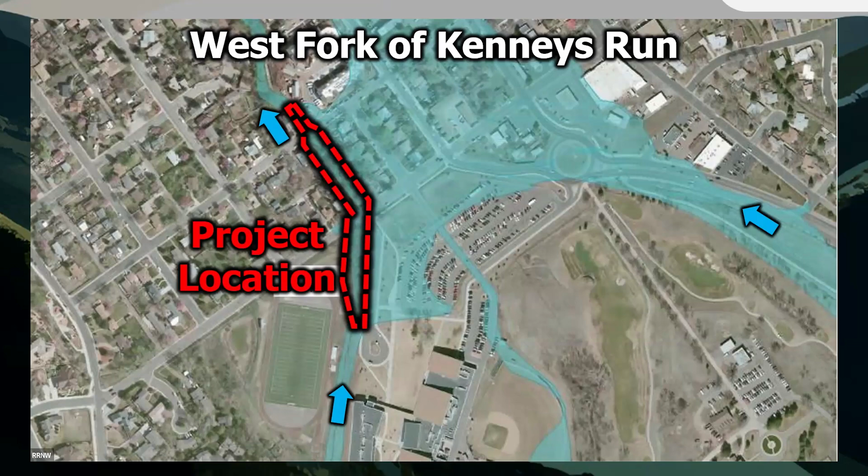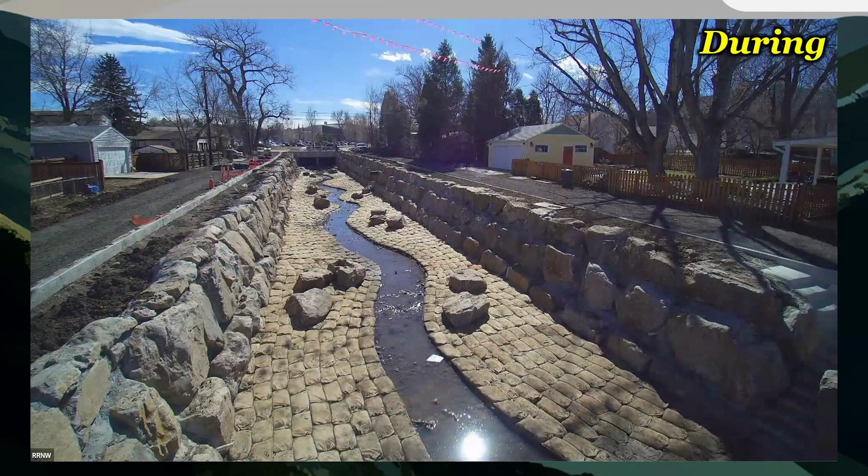On this next project, we were mitigating flood risk to all those structures that are in the floodplain there. We had very little space to work with. This was along some back alleys. This is the existing condition, pre-project. So in order to preserve homes and alleys on either side, we had to use a walled section like this. We wanted a healthy vegetated bottom. Those are a product called Envirolok bags. We don't use those much, but this was a project where we used them.

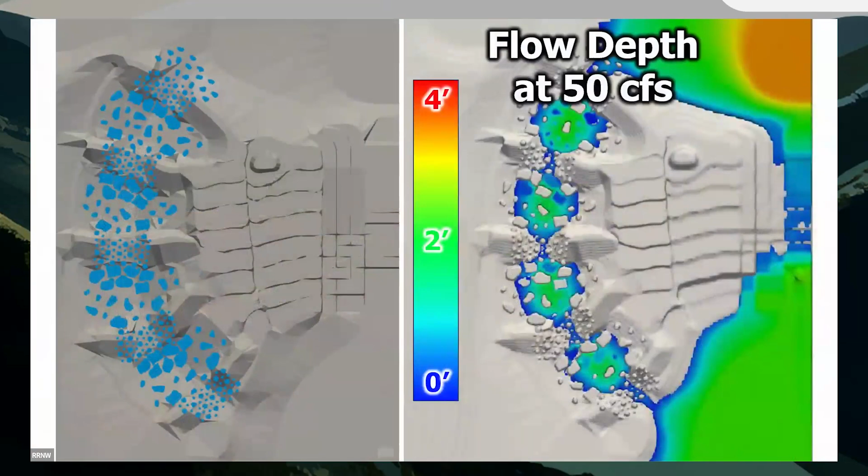And so our poor engineers had to code every little rock you see on the left there into the terrain model to model this in 3 dimensions. This is showing it with 50 CFS with maybe only 5 CFS going through the fish passage.

And actually Chelsea Radabanko, who's here from American Company, who has a booth over there, she was the person who did all these mouse clicks to do this. So if you want to ask somebody about it, she's here.

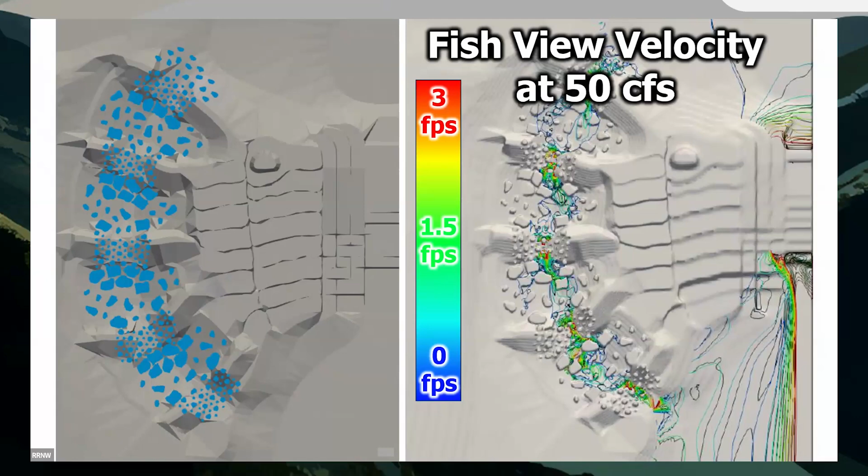But it's just such a cool combination of functions and, I would say, blurred lines. And this is a lower part of the project that's under construction as we speak. It's very exciting. All right, some of you may be looking at these examples in really urban contexts of trying to use nature-based designs and wondering if they can handle floods really well. So I'll show you one last example along Westerly Creek that's downstream of the Stanley Marketplace one I showed you. This is to show you that they can.

This is an engineered channel that used to sit under the runways of the old Stapleton Airport. When the area redeveloped, they left a lot of room for the creek. And with space for flood flows to spread out, resilience is largely achieved with healthy vegetation and some buried riprap. It's infrastructure that looks like nature. This used to be under a runway. I'm going to show you a series of photos taken from this bridge at the bottom right. Here you see the photo vantage point a little better. That ped bridge in the distance is going to show up in all these subsequent photos.

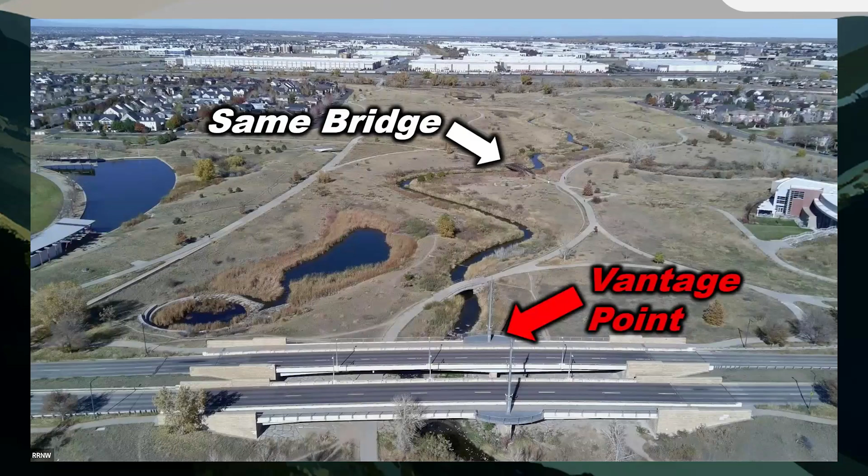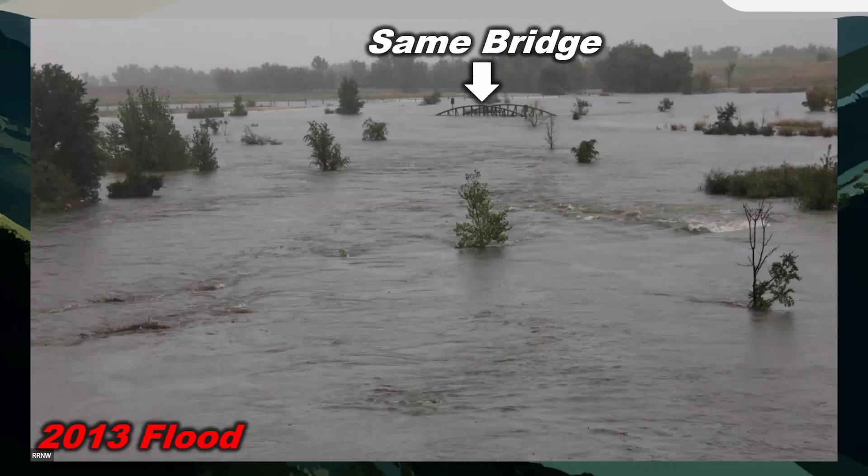So here's an initial photo on a sunny day. Here's the exact same view at the height of our 2013 flood. We had 100-year discharges from around 16 inches of rain. This photo was taken the very next day. And then back to the first photo, which was actually taken 8 months post-flood. So after a 100-year flood, there was literally nothing to fix here. So it's this balance of nature, risk, and community that shows that we can have it all, I think.

All right, so to wrap up, I started with this goofy clip showing me living on some concrete. If you take nothing else from this presentation, I hope you're inspired to think more broadly about what's possible in an urban setting. Also that I used to be able to jump, let the record show. I'd say also that the land use and infrastructure decisions we make have a big impact on what's possible, and we hold a unique opportunity and a profound responsibility to try to get that right. I hope you also understand our urban waterway philosophy that's based on around 60 years of lessons learned. I hope you appreciate that we achieve better outcomes together, but the right balance is very contextual.

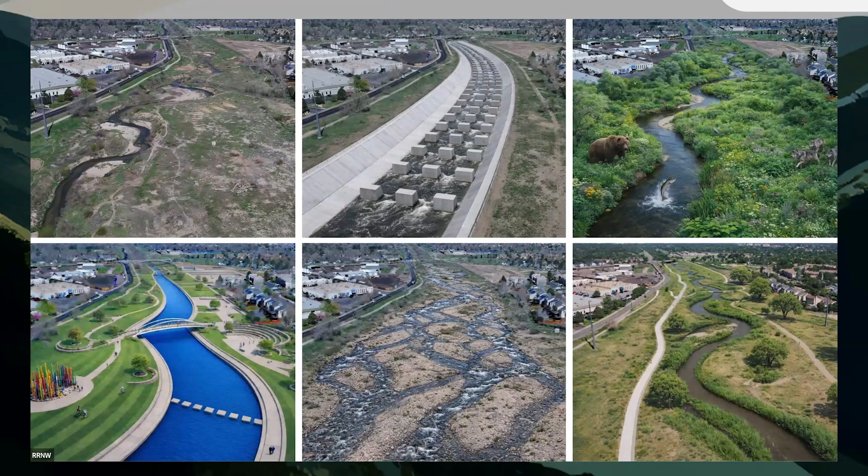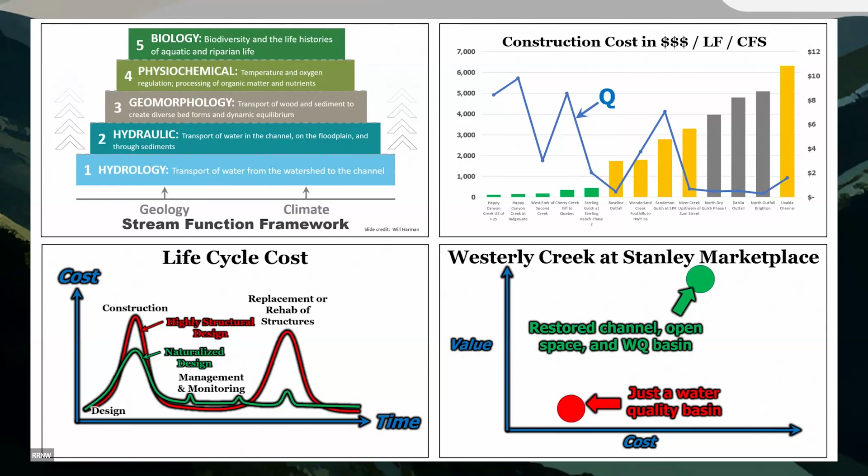It's not a one-size-fits-all. I also hope you better understand some of the technical nuances to stream functions that play a big role in nature-based outcomes in the urban setting. And also that you have some ways to talk about the financial metrics around nature-based solutions. Because sometimes we need to sell people on these solutions, and we have to show them both examples and financials. That helps quite a bit. Because in the end, if we want to create abundance, if we want our communities to be not only safer, but also healthier and more livable, we have to paint with color and not just black and white.